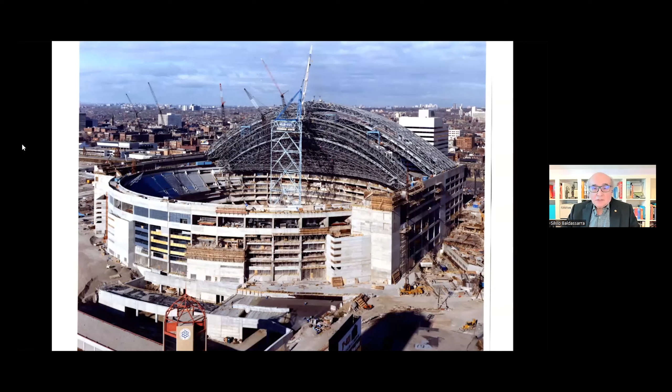This is the areas that I'm going to cover today. I'm going to do a bit of an introduction, and I'm going to talk about the roof support, the roof movement system, the roof seals, the stadium lighting, and the roof catwalks. This is just some of the areas that I basically managed for 3 years.

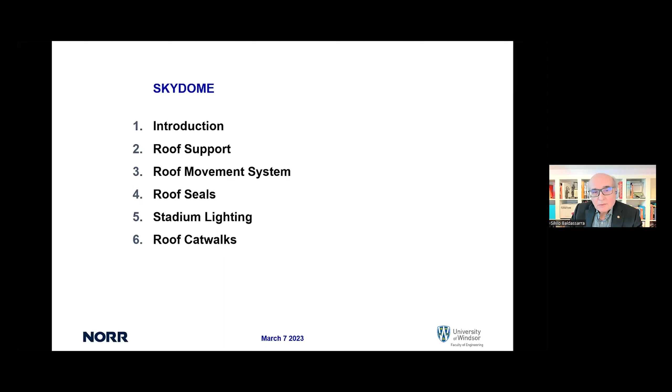I'm going to go back a little to Maple Leaf Stadium, 1926 to 1967. This was at the foot of Lakeshore in Toronto, and this was baseball in Toronto at that time. Obviously an open air stadium, and as you know, many of the stadiums today for the American League have returned to open air stadiums, and this was at the time one of the major leagues in Toronto.

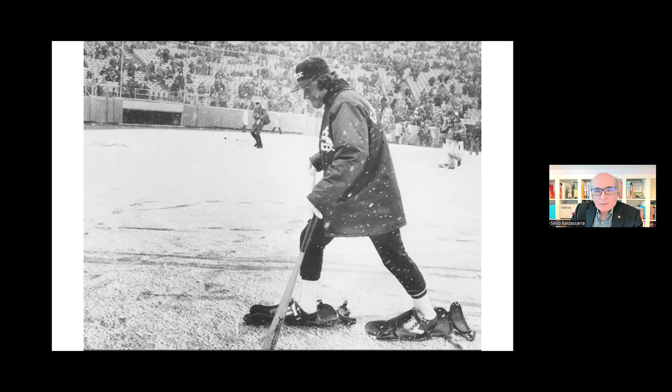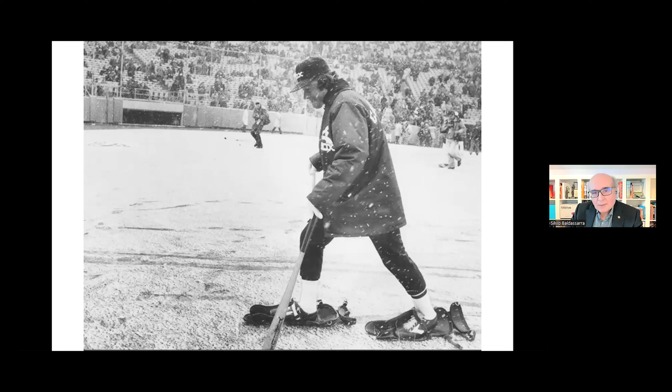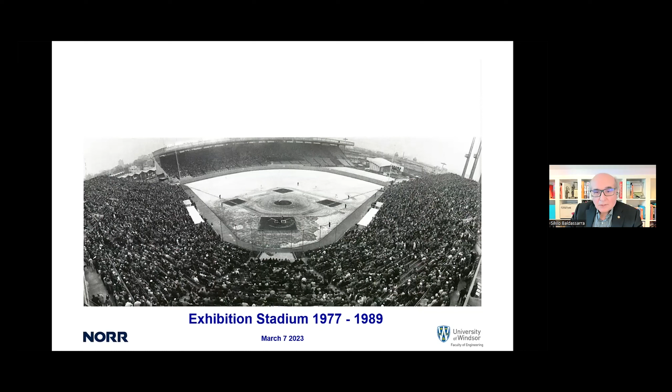But this is unfortunately what happens when you have baseball in a climate like Toronto, where you're susceptible to snowstorms, like most of you know, in Toronto, we had last Friday. In 1977, the team was moved to Exhibition Stadium, and it survived there from 1977 to 1989. You can see, being right off of the lake, the effect of it — what you're looking at is snow in the outfield. So the city turned to, at the time, a competition for a retractable roof stadium.

The project itself was, at that time, a mammoth project.

125 people in the client group, 37 firms. There were 23 firms involved in the designers group with 183 people. And on the building side, 15 firms, 692 people. Over 1,000 people were involved in this project.

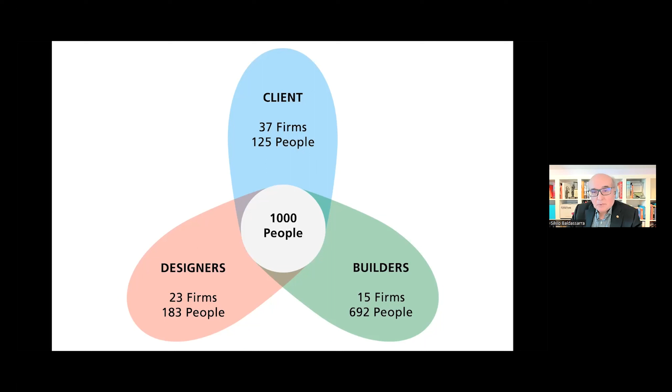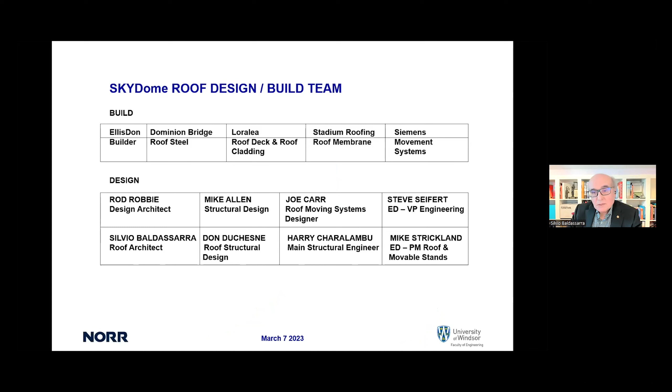This gives you an idea of the build design team, with Ellis Don, Dominion Bridge, Loralea, the stadium roofing, and Siemens for the movement system. Our design team included Rod Robbie, Mike Allen, Joe Carr leading the roof movement systems, and Steve Seifert on the Ellis Don side.

The interesting thing about SkyDome is it was not only a baseball stadium. As you can see here, the blue seats, if you watch the next slide, actually retract and move over for football.

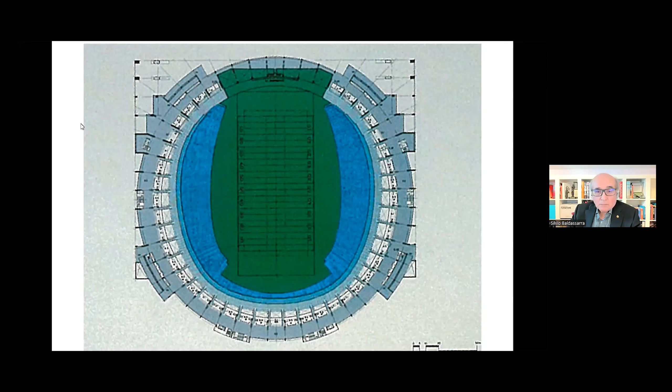It was built for baseball as well as for the football team, the Argos in Toronto. The building actually had a number of radius points. So although you think it's a complete circle, it is a circle on the outside edges, but certainly the geometry of the building was not a complete circle.

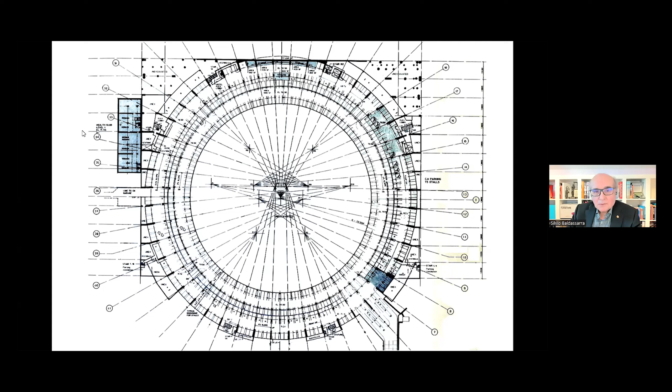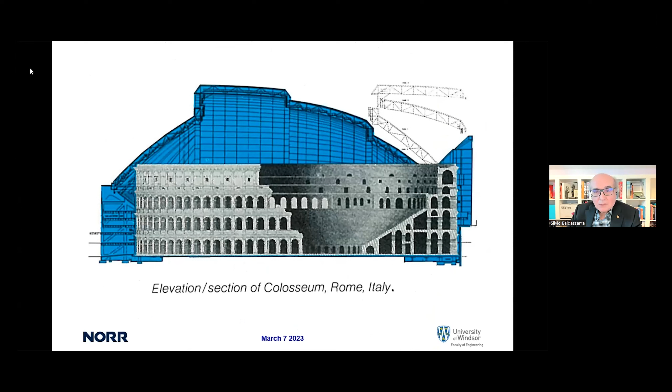This is a section of the building itself. And how big is it? There's the Colosseum, and you can see how big the actual building is.

The world's largest stadium with a retractable roof, an 8-acre roof that has to open in 20 minutes, and no examples to look at.

When we started, it was fairly interesting because there was quite a definition on what the roof needed to do, but there were very few drawings that we actually had to move forward with.

The $175 million competition budget did not - and this was controversial after the time - include a number of things.

In fact, in 1989, the building was a $500 million building. And how does that translate to 2023? $1.8 billion. So there were things that were added, such as a hotel that was never part of the original competition on the north end, a first in a stadium. And there were a number of miscellaneous things.

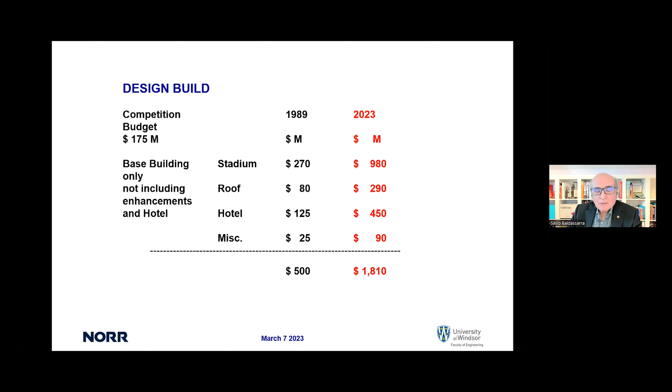The roof was also an add-on that was not part of that original budget. These are things that were actually in the competition that people found a bit of a surprise, but it was in the competition budget. So what were we looking at?

We were looking at something that had never been done before, and I use this image because there was a lot of testing. There were a lot of innovations done in SkyDome that go back to testing and trying things, and failures that I'm going to talk about. This image, the Frank Lloyd Wright image of the lily pad, really speaks to that.

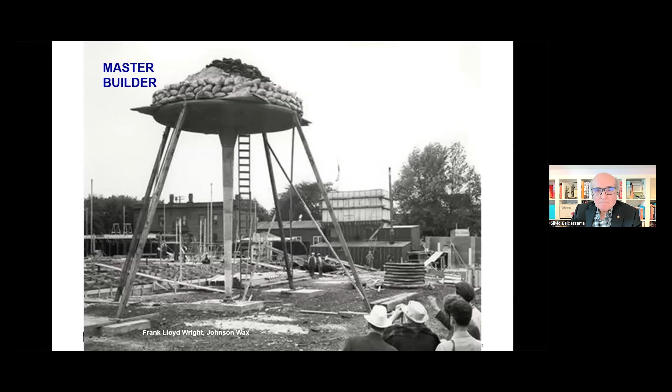The very first thing I really started looking at - I was charged with managing the roof - and the first thing I needed was roof supports. We had just won the competition, I had just started, and there were no roof supports. So we started looking at the roof supports.

The scope: it's an 11,000-ton roof that actually moves. It's not a static roof that sits on a building. In the closed position, it spreads out to the edges, it opens, and it has 4 panels. In the closed position it sits on the roof, but in the open position they're all stacked one on top of the other. In between, it has a variety of different positions.

Significant from a structural and engineering point of view, this is a 1-in-100-year return. If you're familiar with building code today, you're dealing with a 1-in-50-year return. So it's twice as much as any other building.

The design: 210,000 tons of concrete, that's 2 times more than the CN Tower. And then we're dealing with what I had never seen before, a 55M bar - a large reinforcing bar that you're dealing with, where you're designing concrete and trying to put a 55M bar into it. And then we had anchors for the rails, 4 circular expansion joints.

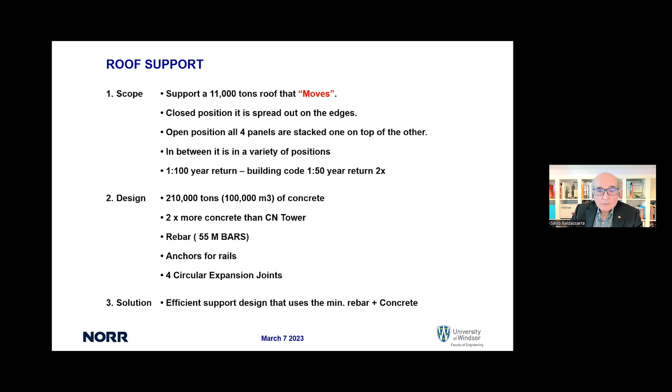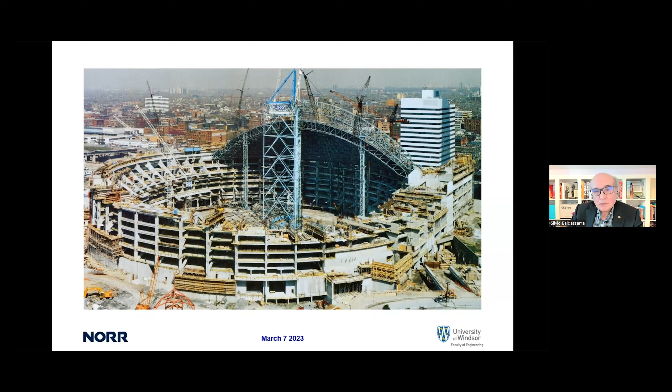And here you can see the concrete and how it interacts with the steel of the roof. All of the roof was erected on the north side of the building, one panel on top of the other, the first panel, and then the subsequent panels being erected on top of that first panel.

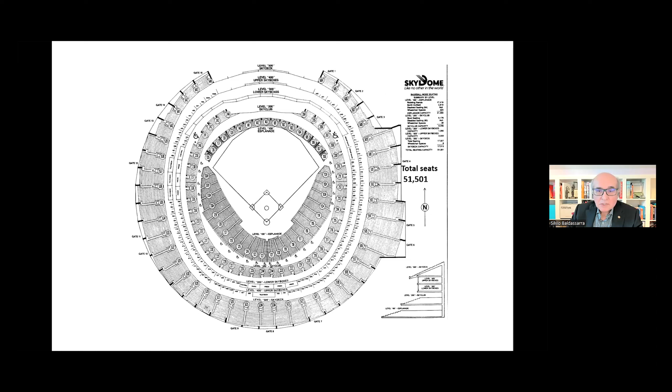Here you see a plan of the building, 51,000 seats in the baseball mode, and you see the seats down below set up for baseball mode, and 53,000 seats for football. And you see the seats that are rotated for football.

So radiuses, 11 radius points. And you may ask, why are there 11 radius points? These were all a result of sight lines for baseball and football. We actually had two people that spent the entire three years figuring out the radius points. Now you have to remember, this is the mid-80s, so there was no Revit. This was all manual. It was people using logarithms and manual work to actually calculate all of these angles in our design, and it was all done manually.

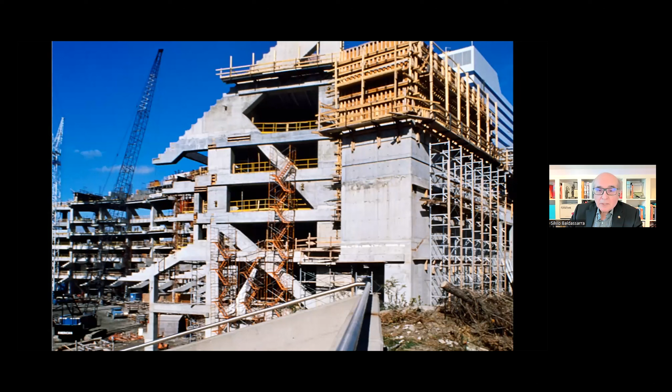So we ended up with a design that had 11 radius points, which complicated the entire design. These are the bents, and every single one of these bents, every third bent went to a different radius point in the building. And here you can see the construction.

And now we get to the roof. One of the first questions that I asked of Mike Allen's structural group was, can I have the structural drawings for the roof? And they said, we have a general drawing, but here's a book of XYZ coordinates. Because the roof was so complicated, it was done from a software point of view. And I had XYZ coordinates, and architecturally, we ended up drawing architectural drawings of what the roof was all about.

But one of the things that I started off with is how the actual roof works. So there's panel 1, which is a quarter dome, panel 2, which is a barrel vault, 3 is a barrel vault, and 4 is the fixed panel, but it's not actually fixed. It actually sits on bearings. And it's the quarter dome at the north end that doesn't move.

And if you see the dotted lines, these panels all move and they end up on the north end of the building. And that basically was part of the field being 100% in full sunlight.

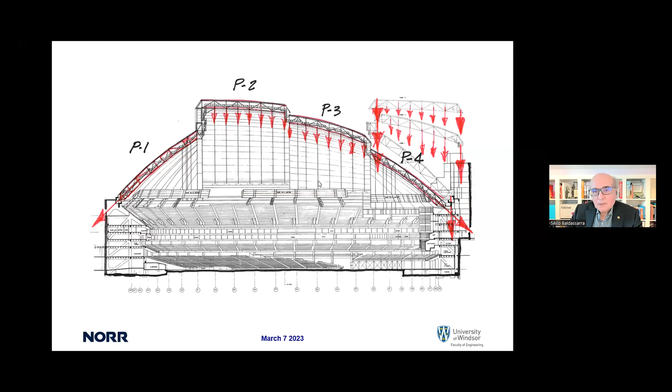In the other direction, you can see the barrel vaults, the arches of the barrel vaults. And significant is the fact that these are arches. Understanding arches, the forces of the arches want to project out of the building. Our sight line was here, so we didn't really have any room here to do, if you understand flying buttresses, Notre Dame, and the Gothic churches of the world. There should have been a buttress here to take the reaction of the force of this arch.

What structurally actually happens is that force is actually taken into the concrete in a reverse fashion and tied back into the structure in this direction. However, the force of the arch comes in through this direction. So that was sort of one of the first lessons that I learned, and I took that.

The other lesson, and you have to remember, this was a design competition, and a lot of this information we didn't have during the competition. Not only did the architects and engineers not have this, but neither did Ellis Don, who put in a fixed price for this building. And this is the wind tunnel at RWDI in Guelph.

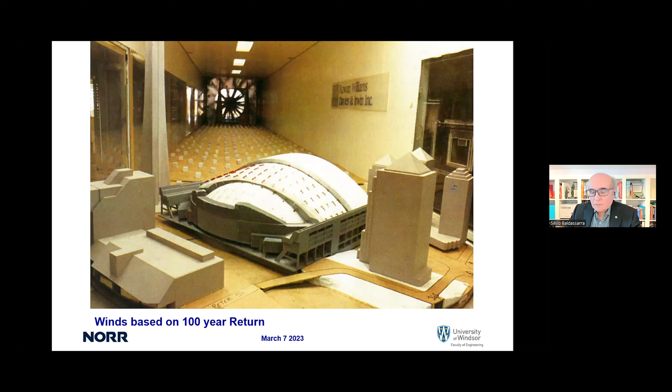This was done well into the first and second year of us working on this building. And this is the wind tunnel that talked about the forces on the building. But more significantly than the wind is the snow and the snow loads.

So the design that we had at the very beginning, which is the design that went into the competition, was that we would have the actual trusses come down to a pin on a bogie that had wheels that ran along a track, and the concrete would be basically configured in this direction. This is the sketch that I started with, which came out of the competition.

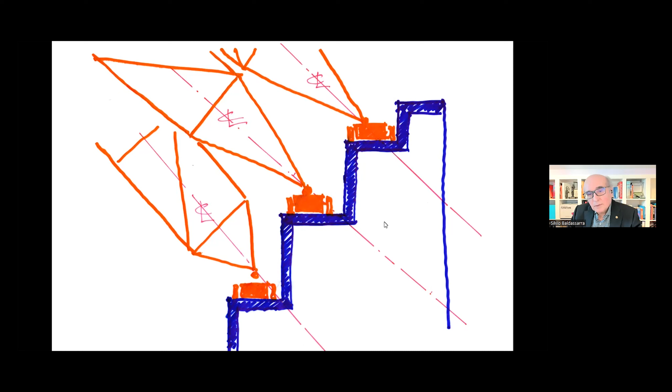One of the things that I noticed immediately, and we started talking about immediately, is the force comes down in an angular direction, but the wheels are vertical. You can see here exactly what's going to happen. It's just not going to work. The wheels are just going to fly right off.

So there's a bogie. It's a typical bogie, train railroad technology. It's fail-safe. It's been around forever. We looked at a number of other potential movement systems, but we kept coming back to this system because it's fail-safe. We knew it would work, and all of the other approaches that we took, we decided just weren't safe enough to go with. I can talk about those later in the discussion period, but this is what Joe Carr's group and we felt was the safest way to move forward on the movement systems.

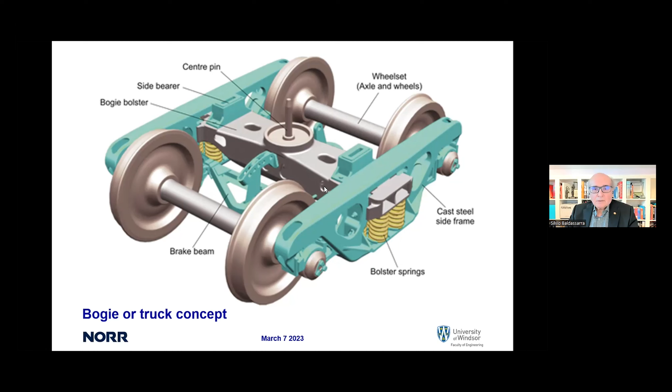So if you try to rationalize this, the force comes down in the trusses, especially the arches. And the right way to position that bogie and the wheels is in alignment with the force on the truss, so that the wheels sit in this direction.

Well, we're dealing with design build, and there's Ellis Don, and the superintendent, who was probably the strongest proponent of building this structure. When I presented this to him the first time, he said, there's not a chance that I'm going to build formwork that looks like that and pour concrete in that direction.

The other problem with this is that when I drew this, Mike Allen said, that slab's not actually going to work. What you're really going to have to do is put in beams that would actually take that kind of reaction, because at this point we actually knew what the loading was from the snow loads from our RWDI, which were way more significant than we ever thought. So from a structural point of view, we needed a beam that was this deep underneath each wheel, or maybe a beam that was this deep right in the middle to take those kind of reactions.

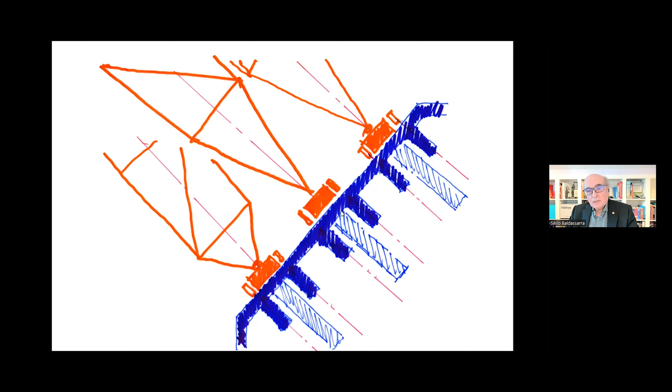When I took this back to the superintendent at Ellis Don, he said, absolutely not. We're not going to do formwork like that. We're not going to build that. So go away. So I went away and came up with this solution where I knew that they could build horizontal formwork and vertical formwork, and that was possible.

So we ended up with a design where we would take the force in here and we split it between vertical and horizontal, and we ended up splitting the beam. So basically that wheel comes down and the beam is basically split, and that's the length of the beam that we actually needed to resist the force on each one of these wheels.

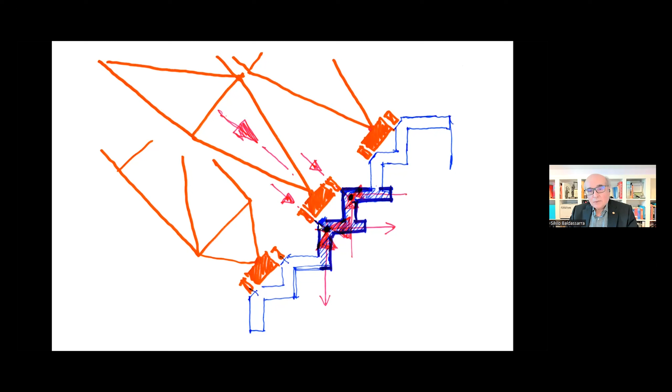That was the design sketch, and this is the actual final drawing. So this looks somewhat complicated, but it's not. It's what's actually required to resist the loading from the wheels on the actual bogie from the roof.

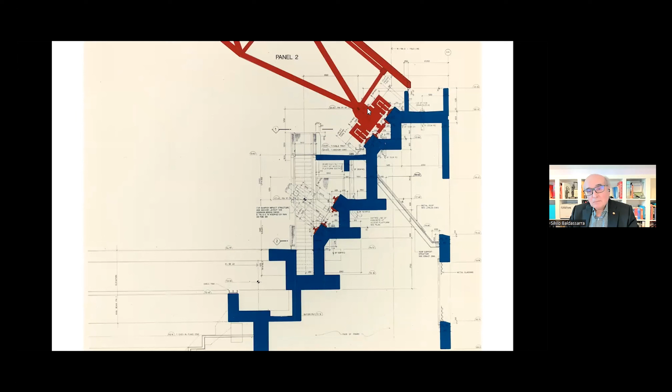The rest of this is all to do with the snow load. And if you saw the snow accumulation on the RWDI snow area, this is the amount that we actually need to drain that snow. So the snow comes down here and it's all picked up and the drainage is collected. These areas are for servicing so that we could replace wheels and maintain these areas. This is the upper panel, panel number 2, which is the highest panel. And so that's basically the design.

The one area that was somewhat different is panel number 1. Now, number 1 is a rotating quarter dome. And it's different because panel number 1 isn't a barrel vault. It's actually a dome which has significantly different attributes to it. It actually has an uplift force, because as it turns around, wind gets in underneath that panel as it's moving, and it has an uplift force. So it not only has an out and a down force, but it actually has an up and an in force.

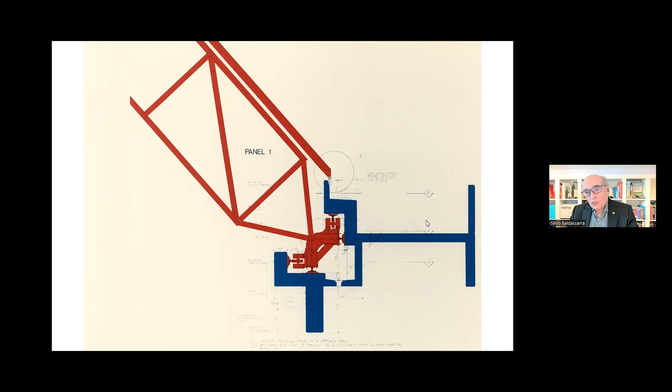So we actually stretch it and it becomes the gutter. This one has the most accumulation of snow, and it becomes a very large gutter at the south end of the roof. And there's the first slide you saw, the configuration of panel number 1.

With the down wheel, the in wheel, and the other two wheels, you're looking at a fairly massive truck for panel number 1. And then panel number 4 — as I said, panel number 4 is fixed, but it's not really fixed.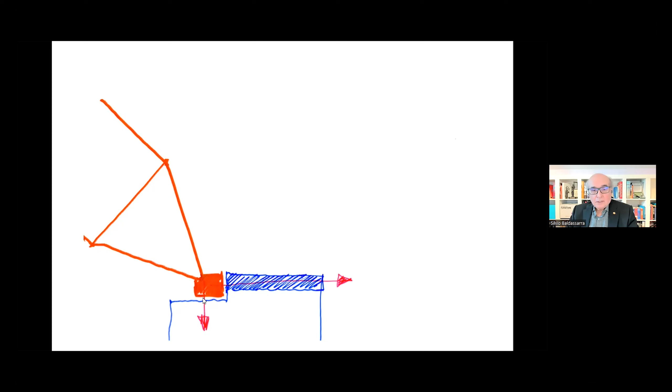Because it's a steel dome, because of expansion and contraction, the steel will move on the concrete. So what it has is bridge sliding bearings. It actually has bearings on the vertical and the horizontal that allow it to move, but it still has the same issues with being resisted both horizontally and vertically, taking the load for that panel. That's what the configuration of panel number 4 looks like.

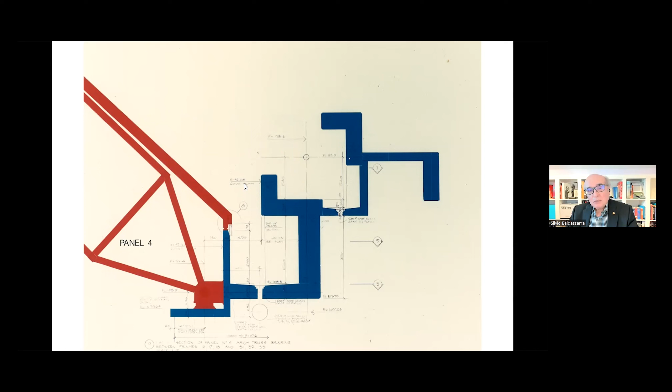This deep pocket here for panel number 4 is the gutter for panel number 4, because it's in the north end. When the roof is closed, this is completely outdoors, so the snow will drop in here. This is the track for panel number 1, because when panel number 1 rotates, it actually sits on panel number 4, and that's how close it is. There's about 900 millimeters difference, a gap between panel number 1 and panel number 4.

Now, one thing I'm going to keep going back to in this whole presentation is: no Revit, all manual. We drew all of this manually, and you have to remember that all of these trusses are not circular — they're straight line approximations from one member to the other. So there were a lot of 'is this going to work or is it not going to work?' I can't tell you how many drawings we did manually trying to figure out if it was going to work, if it was going to clear, if we were going to make the clearances we thought we had.

Because there was no way of doing this at the time. Today, with a Revit model, you can do this incredibly easily. Back then, it was incredibly difficult.

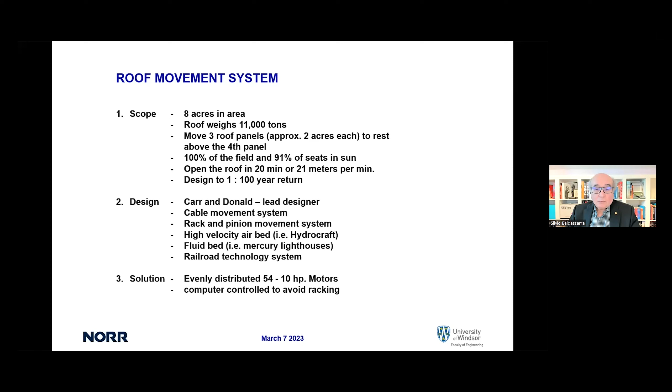The solution: eventually we ended up with 54, 10 horsepower motors. They're DC motors, not AC powered. And it's computer controlled to avoid racking from one side to the other.

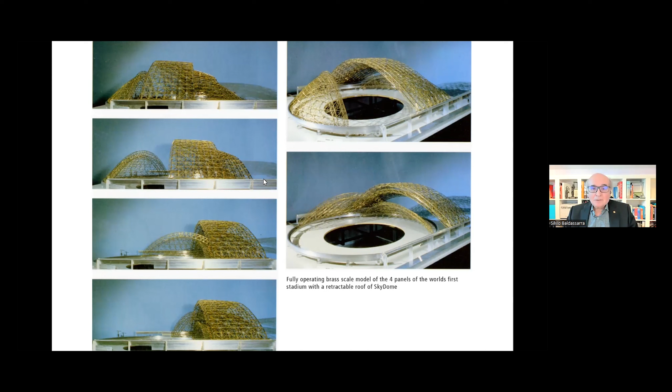So for the panels, I'm going to take you through the sequence. This is manual, but it was the way we did everything back in the mid-80s. These are the actual drawings that we used.

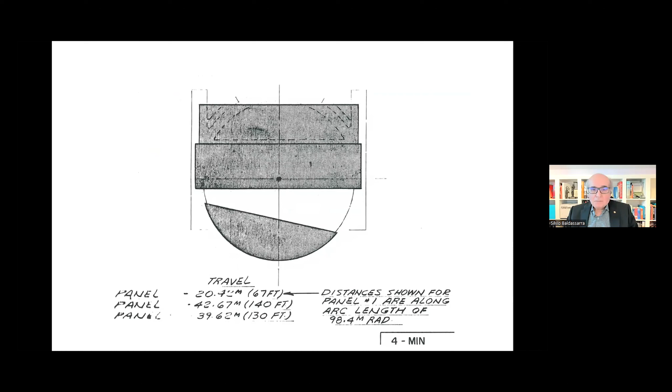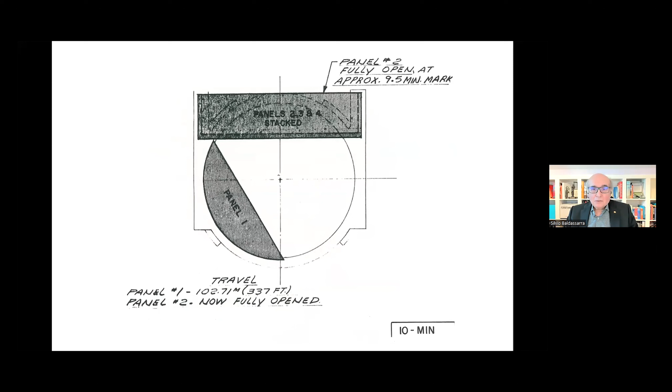As we start, panel number 2 moves first so that it detaches itself from over top of panel 3. At that point there's a gap between the rotating panel at the bottom and panel 2. They start to move in sequence, moving together as panel 2 continues over panel 3, and they continue to move. At this point panel 2 and 3 are over top of panel 4, completely at the north end. Then panel 1 slides in underneath panel 3 and panel 4, and continues until it's completely stacked underneath 1, 2, 3, and 4.

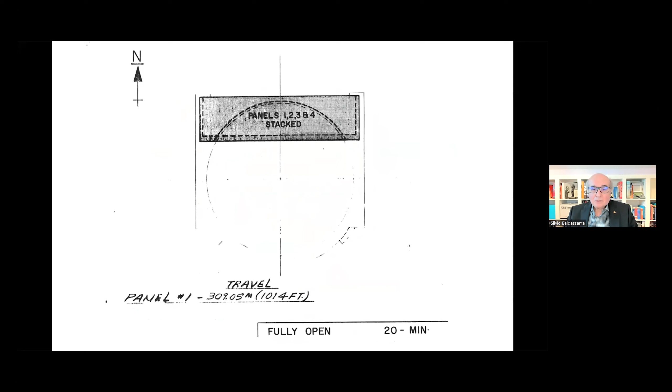And that's 20 minutes.

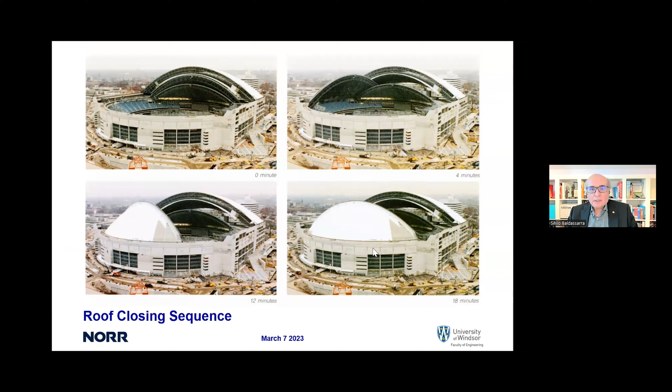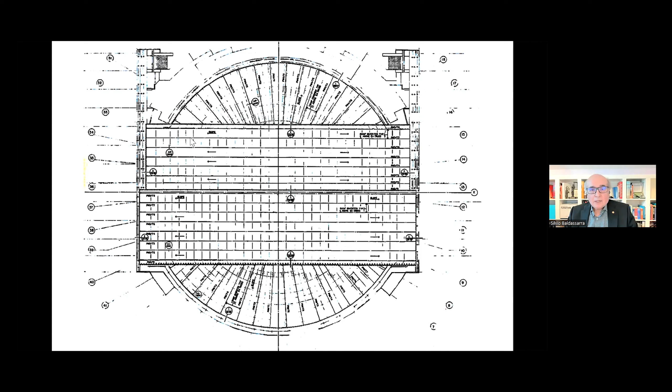The roof—these lines you see on the roof are PVC, Sarnafil. We actually invented these diverters because we were quite concerned about water migrating. We had the wind tunnel studies; we were concerned about water migrating from one side to the other. So we invented these V-shaped diverters, and Sarnafil actually took that idea and went on to make a product that does that a few years later. These diverters were designed with RWDI, who helped us come up with the actual heights, which ended up somewhere around 7 inches, to prevent water from being blown from one side to the other, because we were concerned about getting too much water into the gutters and overflowing.

Just as a point, the water all comes down to the gutters and is taken down at one end on each side, and the actual water is taken down in a water leader that's 36 inches in diameter.

Back to the movement systems—these are the trucks, and if you can read the actual loading on the trucks and where they're positioned, you can see the static factored loads change as they go from one end to the other for the barrel vaults. When they're in the closed position, they're lower than when they're in the open position, because you've got one panel on top of the other.

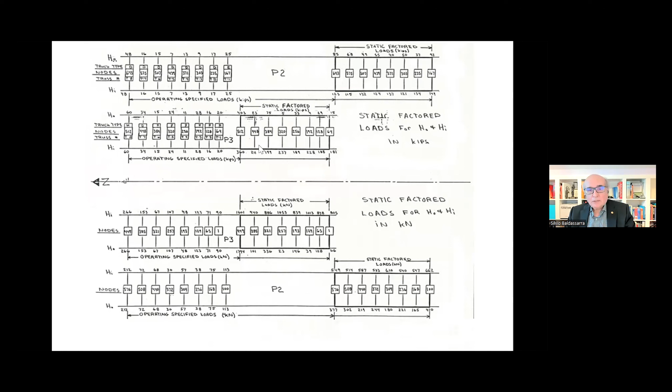And the trucks—these are the drawings that Joe Carr's office handed me to work with for the concrete work underneath the trucks, and this is the drawing I basically worked with for the rails.

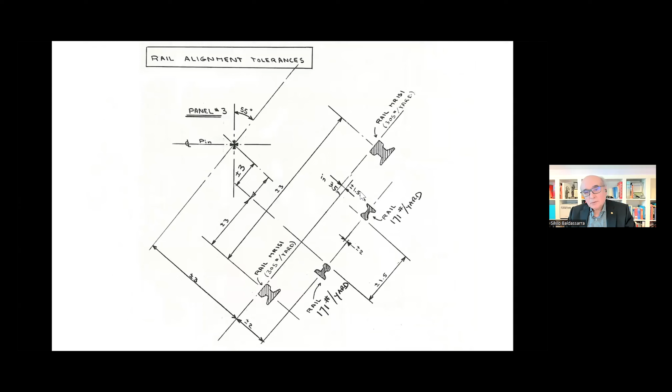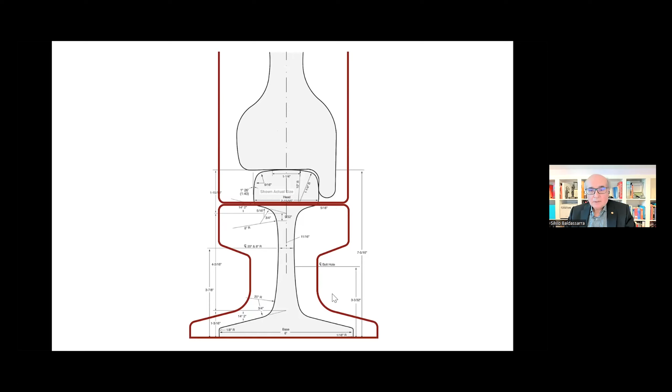These are not ordinary rails—these are MR rails, which are fairly significant. What that really means is, here's an ordinary rail with a regular wheel for a train. This is what you're seeing in red, an MR rail, and there's the wheel for one of our trucks—basically a 6-inch wheel, and it's solid.

And this is our architectural drawing, and it really shows you the concrete. It shows you the middle wheel. So there's 2 wheels on the truck that come down on the MR rails. And then there's a center wheel, right on axis with the pin for the truss. That center wheel just prevents the truck from sliding off. And then this shows you the servicing area, the drain, because sometimes this is inside, sometimes it's outside.

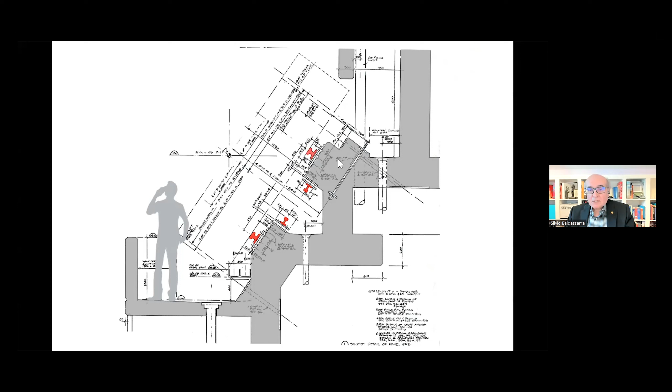And then there's an incredible amount of information here. These are the cable rails for the powering of the roof. I'll get into that in a little minute. And then these are rails, basically anchors for the trucks that are embedded in the concrete. So there's an incredible amount of anchorage that's in. When I was talking about the 55 M bars, not only is this concrete reinforced because it's acting as a beam to resist the load of the wheel, but it also has the 55 M bars plus the anchors, all of these anchors for the actual rails.

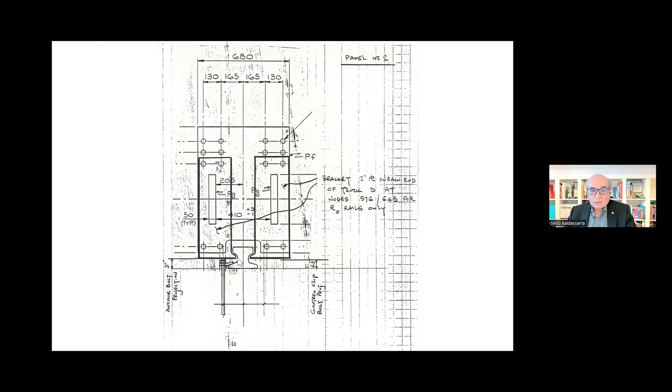Then I put this in, it was in the image that you saw, but these trucks, even when they're in the closed position, have an uplift wind force on them. And this is basically the design that's to keep the truck from moving vertically based on uplift on the actual truck. So it's a large plate at the end of the truck that actually wraps underneath the actual MR rail. And there it is right there.

So it doesn't look like a lot, but every one of these elements, we spent an incredible amount of time working out the anchors, the piece of steel. There's the pin. This pin is an 8-inch solid pin, and there's the actual truss that comes down, and there's the middle wheel.

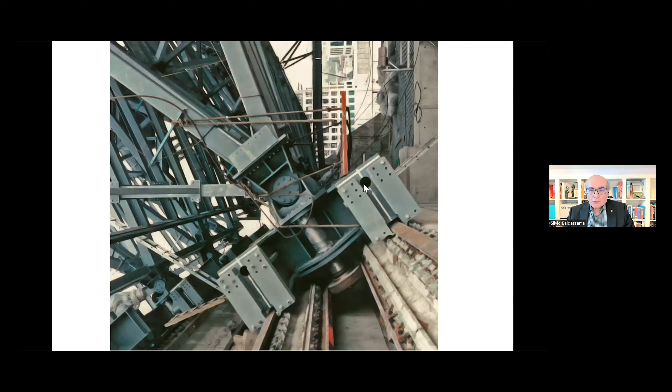So the roof itself, the power is in the roof. It comes in on a cable reel. It comes into a transformer. The transformer converts it to DC, and then it powers the motors that are on the actual trucks. So if I go back, the motors are actually on the trucks themselves. So everything is contained within the roof.

And it's powered from a control room. The controls were actually updated about 5 years ago, but it's basically the same system. Instead of what you see here in the original, it's been computerized, but it's still the same system.

Roof seals. This was the fun part of the project. So we had to seal the roof. When EllisDon bid the project, they actually carried Seal Master, and Seal Master is one of the biggest seal manufacturers in the world. They're out of Ohio. They do work for NASA. I mean, they were the best people to go to.

And so I took a trip down to Ohio, went to their plant, and after reviewing what they could provide, they said, we can't help you. So you're on your own. So what we did was, their maximum was 200 millimeters. That's their maximum that they could actually do, and I'll show you the problem that we ended up with.

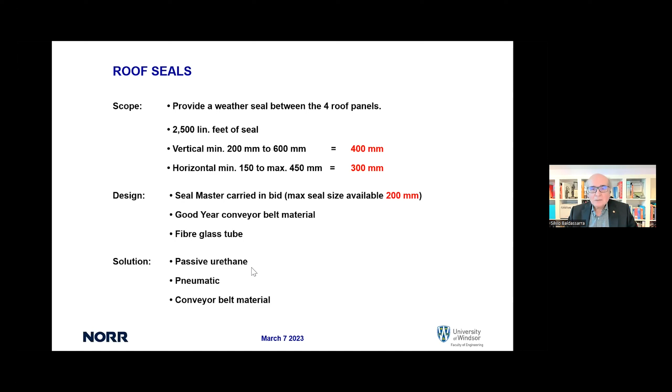So we ended up looking at a whole series of different manufacturers. We actually spent quite a bit of time with Goodyear in Ontario. We looked at fiberglass. We looked at passive urethane. We looked at pneumatic. We looked at conveyor belt material. We actually looked at all of this in-house, basically because there was nothing on the market that could deal with the issues that we had.

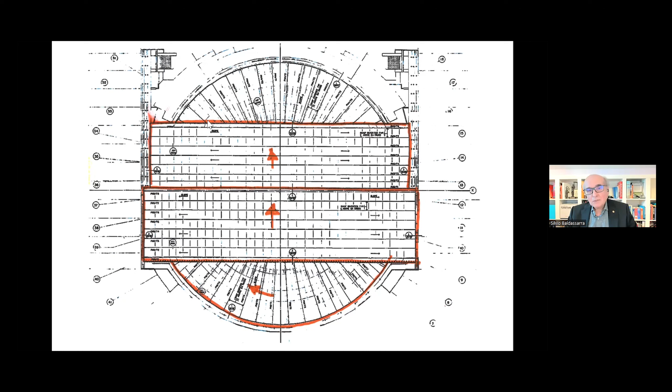And here's the problem. This panel rotates underneath this panel, and it has to be sealed at this point. This panel moves in this direction and has to be sealed at this point to the other panel, and this panel moves in this direction. So the seals are here, they're here, and they're here. And then at the sides, we have to seal to the building.

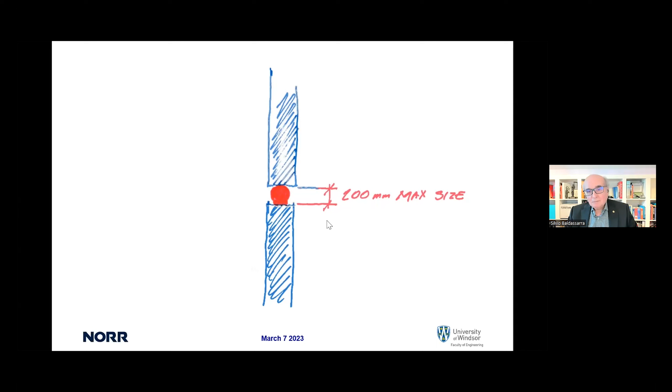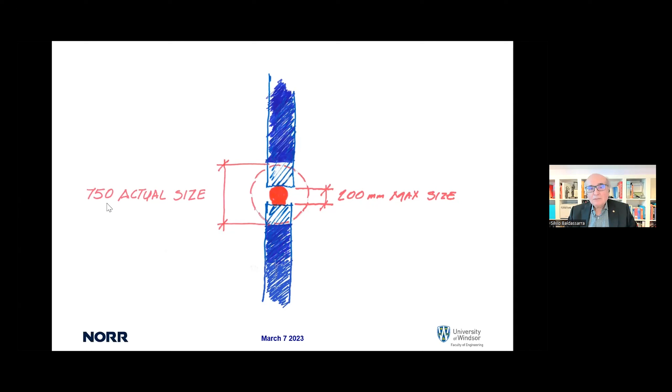Well, when we did the snow studies, because the snow does two things. Here, it's somewhat in the middle, but the issue was the unbalanced snow load. And we thought we had 200 millimeters maximum. The reality is that when we went through the unbalanced snow load calculations, instead of 200 millimeters, it was 750 - that was the movement that we had under unbalanced conditions.

So when I say unbalanced, here's what happens with an arch. You have an arch above an arch, and if the snow is on this side, this panel will drop, but the reverse happens on this side - it actually gets closer to the arch on the other side. So on this side, it actually drops down, so it expands. On this side, it actually reduces. In the middle, it's somewhere at rest.

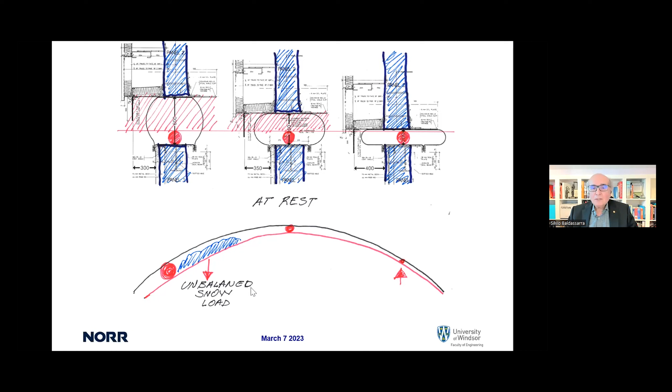So in looking at that, what we came up with is the final solution, and we worked with the University of Toronto with a number of different materials that we took into the lab. Professor Packer at the university worked with us for over a year on these designs, and we ended up with half-inch urethane, and we ended up with a passive tube. Basically, these are the designs that we ended up with, and this is in the lab at the University of Toronto.

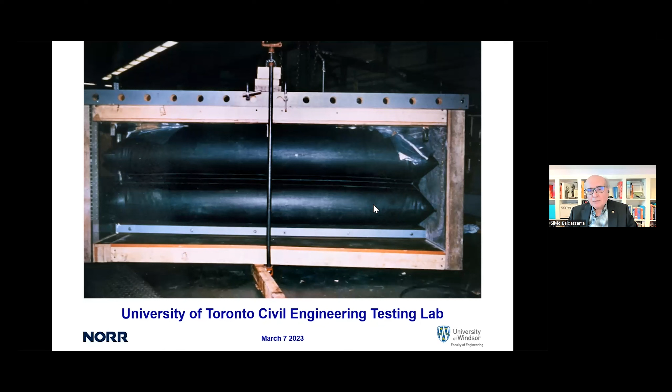There were two designs. This is one of the tubes that we ended up with. This was a pneumatic system, a tube under pressure that we would deflate when we opened the roof and inflate when the roof was closed. This was between two of the panels. So it basically inflated, and it would allow for it to be flexible between one side and the other.

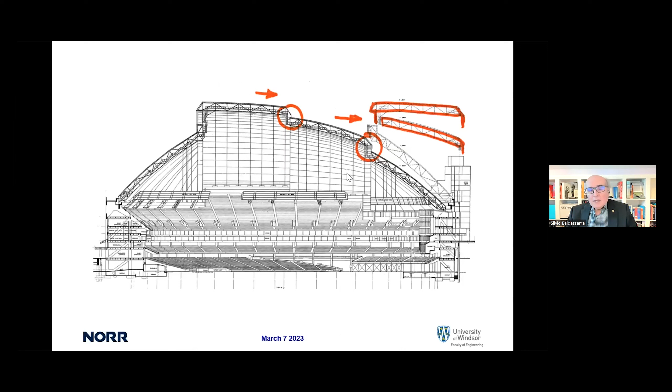And then the second tube was this one, which was a urethane tube, and it was slightly different. Because these were barrel vaults, they move away from each other, so we were able to drop a leg from the upper panel in front of the lower panel. So this was basically a bubble tube that would actually compress, a bit like your car bubble on your door. So that would simply compress.

And this was urethane, basically a passive urethane. This does not have air in it. It's just basically a urethane tube which simply compresses, and it allows for the upper panel to move up or down. This is what this one looks like. So we just had to make sure that we had enough clearances.

And we took both of these two to mock-up, and both of these two systems, this one in particular, which was the longest one between panel 3 and panel 4, are still in existence today. They're still working, they've never been replaced, and polyurethane is almost indestructible.

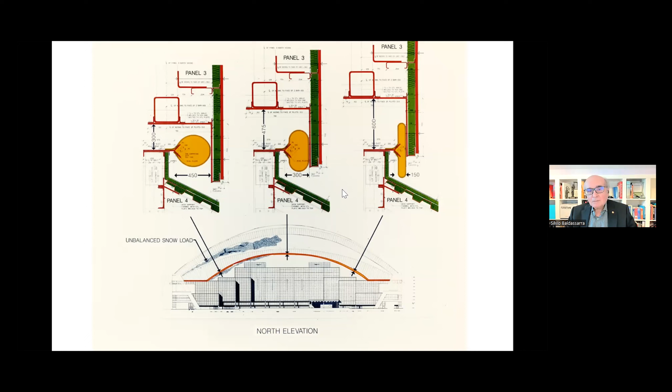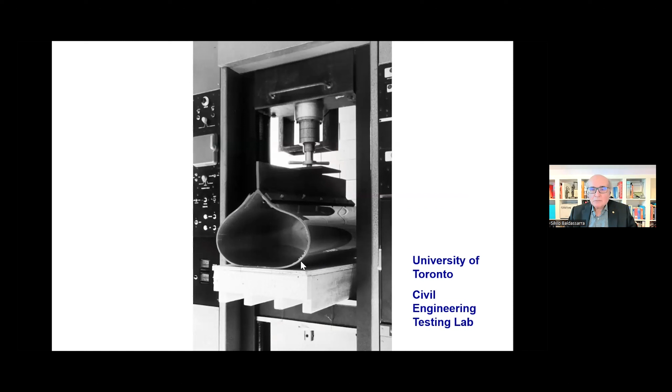This is the polyurethane at the University of Toronto in the lab. We did an incredible amount of testing in cold and warm, and it has a memory to it that none of the other materials that we looked at had. So it was a huge success.

And these are the drawings that we did. There are adjustments in this, and this was not done with any company outside. We did this all internally.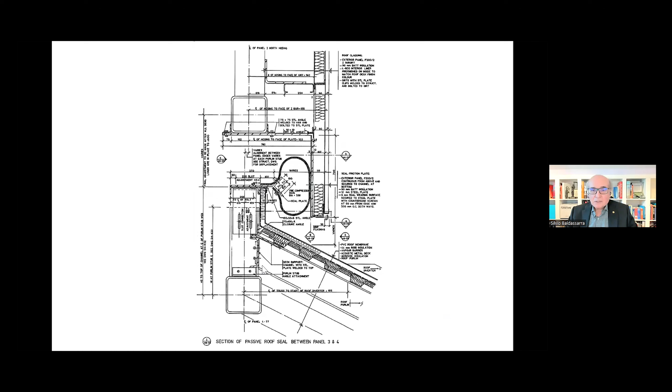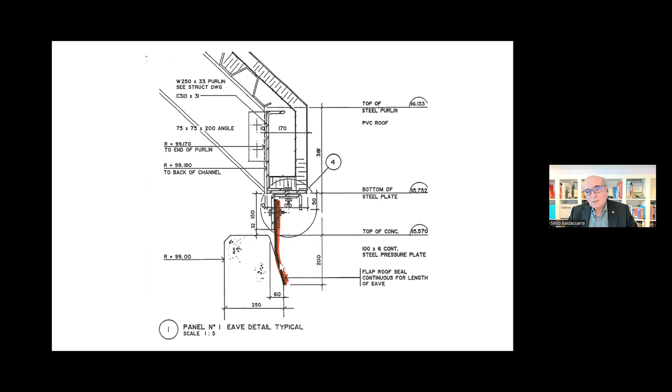And then the last one, the failure was the conveyor belt material, because it's one of those indestructible materials. So it failed in all of the other configurations where we used it, but we used it on the side, and it actually was exceptional there. It just comes along, rubs against the concrete, and makes a seal.

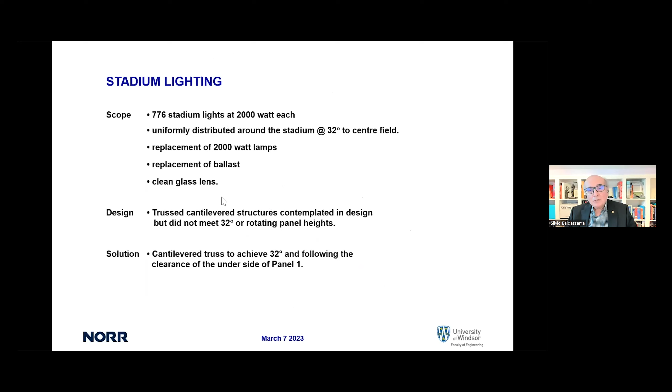So stadium lighting, I'm going to move a little bit faster here. 776 stadium lights, 2,000 watts each. They had to be at 32 degrees to the center of the field, 2,000 watts.

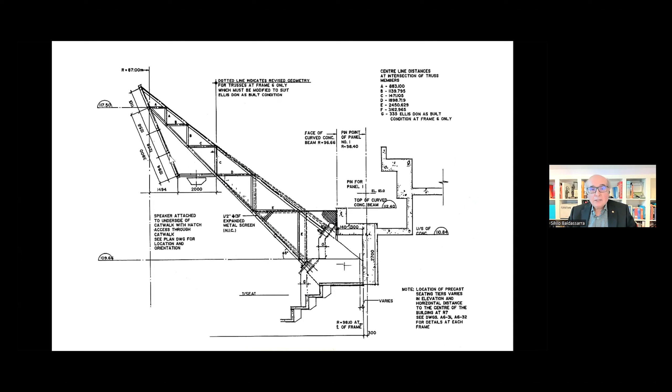Raise it with a truss. It needed to be serviced. The lights were quite large, and you needed to flip the lights so that you could actually service them. So there are the lights. You need to get up here in a catwalk and flip them around.

When I proposed that we do a full-scale mock-up to make sure that this would work, Ellis Don wasn't too sure that we should be doing it, but they eventually saw the light, and we did a full-scale mock-up to make sure that this worked. And of course, it did.

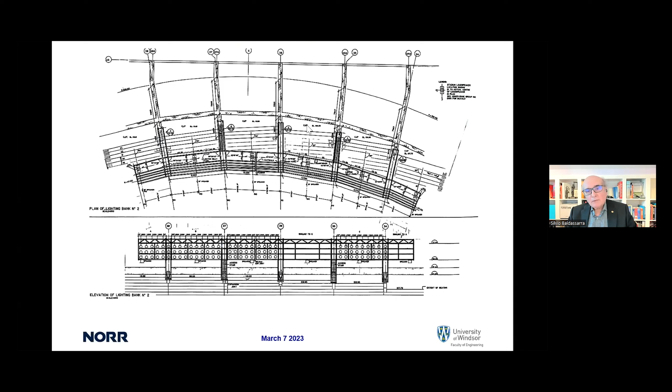But there are a number of things that we had to replace, clean the lenses, do things to it, because they go all the way around the building. And here are the angles. So getting back to the 11 radius points, every single one, every third bend, they go to a different radius point. And then there's that clearance that I pointed out earlier, extremely tight to panel 1, which rotates around most of these lights.

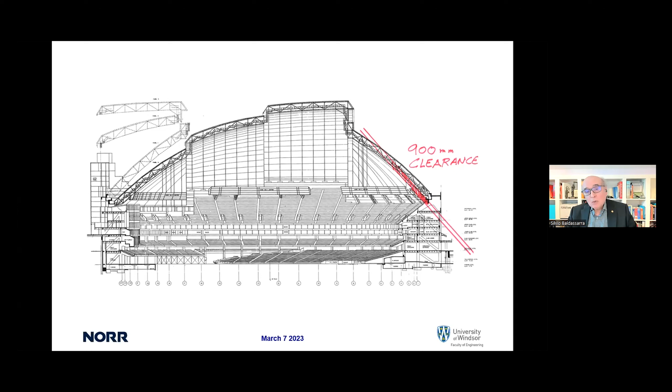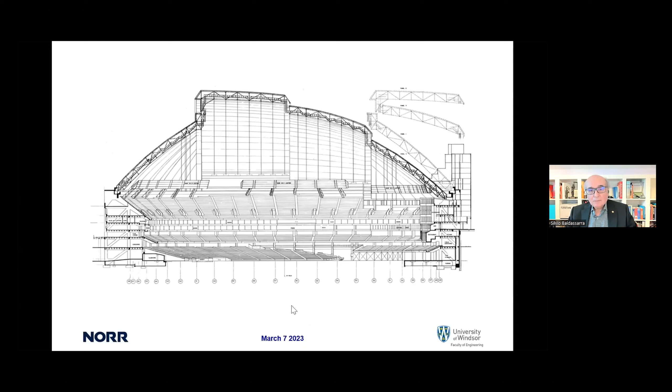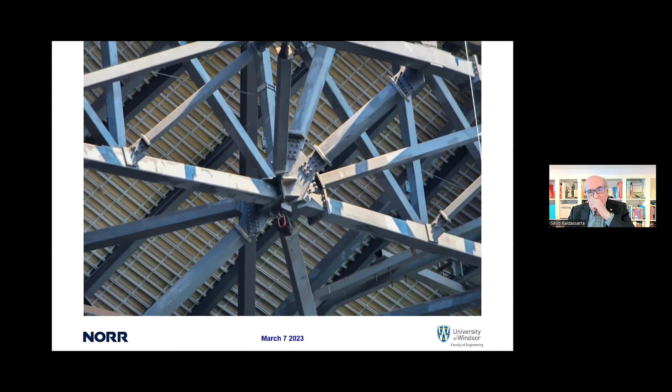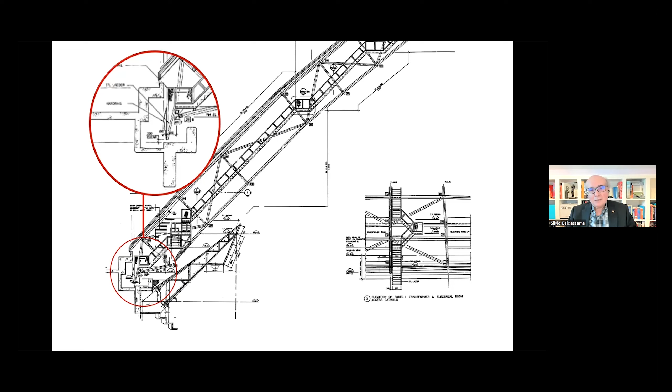We quickly learned what a king post truss was, but the king post truss changed from one to the other. Architecturally, we're drawing all these things, and we have to put catwalks through all of this roof. You can just imagine drawing every single one of these king post trusses and making sure you've got clearance to put a catwalk through all of this from one end to the other. You have to get onto this at the very bottom, so you can see the complication of getting in here and making sure you can actually get up and into this. We went down to Maple Leaf Gardens in Toronto and took a look at their catwalk, and it was simple - unlike this, and this all had to be totally contained in the roof so that it could actually rotate and open. And then how do you go from one panel to the other?

Well, here's the solution - you simply leave a riser out. So it disconnects there, there's the seal. You leave a riser out, and then when it pulls apart, it's just missing a riser. And that was the solution. That happens everywhere, we just leave a riser out.

And the real difficult part was not only do you have to get from one panel to the other - you can see how difficult it was getting through these king post trusses up here - but one panel actually nests into the other. So in the closed position, these actual stairs actually nest into each other at the north end. And that was quite a feat.

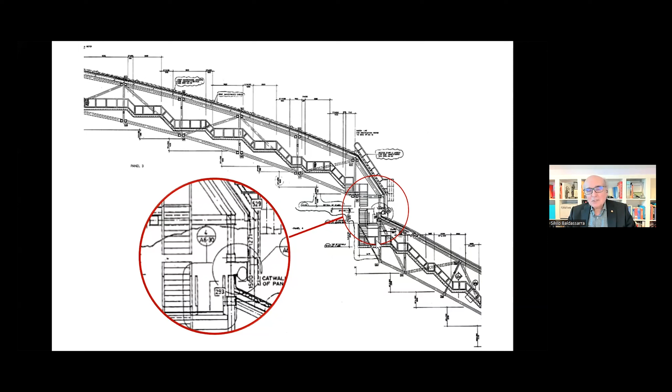So what are the lessons? Not always about the cheapest solution - there's probably better words than cheap - and I think that, as a design build project, working with Ellis Don was a dream. We actually had most of our roof drawings at the Dominion Bridge plant, and we had them all up there because it made the most sense. The people who were doing the shop drawings and the roof were there. We could sketch on chalkboards and get our solutions passed, and everybody really was part of the design solution.

Responsibilities - so is it architectural or is it engineering? It's both. There's no line in between. The catwalks is a prime example - whose is it? What we did with the catwalks, there's a lot of steel, there's a lot of metal, there's a lot of things that overlap between engineering and architecture, and both disciplines were part of that.

Specified - the seal was a perfect example. That 200 millimeter seal would have never worked, so we take it away and we design it and find the best solution. And then the last point, the design build process - I've always been sold on design build. It allows you to really work with the industry to bring the best solutions to bear. And then this thing called attitude - just forget about it.

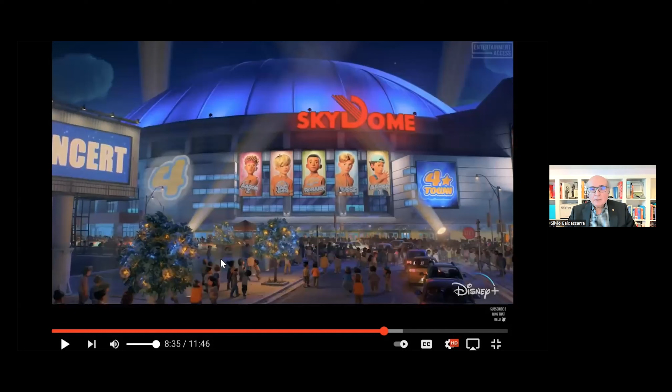And then this is the yearly party, and there were 4, and what we did in the 3 years, the major 3 years, was huge. And before we get to the panel, I just want to leave you with one thing. To a lot of us that were part of this, and the people that are in that image, it still is SkyDome. And if you saw the movie Turning Red, this proves certainly to the next generation that it is SkyDome.